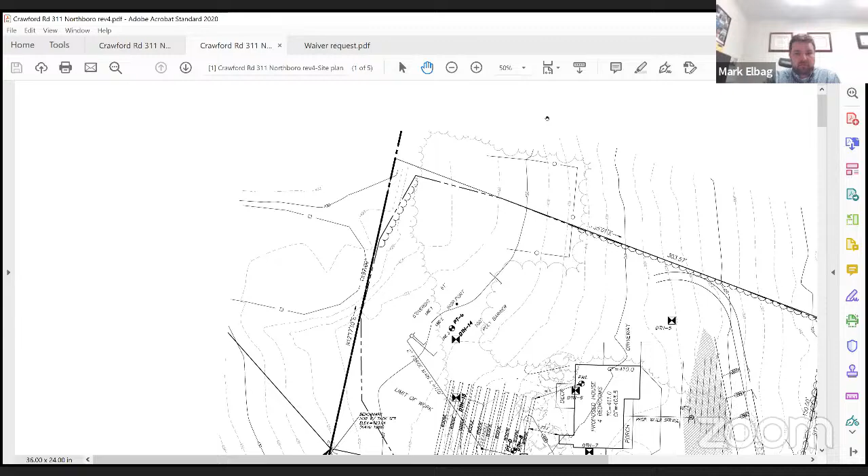So can folks see that? I'll zoom in a bit, it might cut off the letterhead, but I can see it. This is the basis of the lot, at a 50% zoom. So just to go back, we originally permitted, or this is the original plan set, just to bring folks back to where we came from. Okay, this is the original plan set.

It's a single family house to be served by an on-site well, private driveway, and on-site private septic system. The disturbance was right around 40,000 square feet, but this project came into this permitting process because it's part of a bigger 4-lot ANR. The current owners purchased just this lot off of the original landowner that had divided this up via the ANR process through the planning board.

So the original design has a driveway coming in. We designed somewhat of a long driveway to compensate for the slopes and the elevation climb needed to get up to the building envelope on the lot. We have the house in about the middle of the lot with the septic system in the rear, well in front, and graded everything towards this stone swale and a little velocity pool here before ultimately discharging to the street. As you can see, this entire lot is above Crawford Road. Everything does drain to the street.

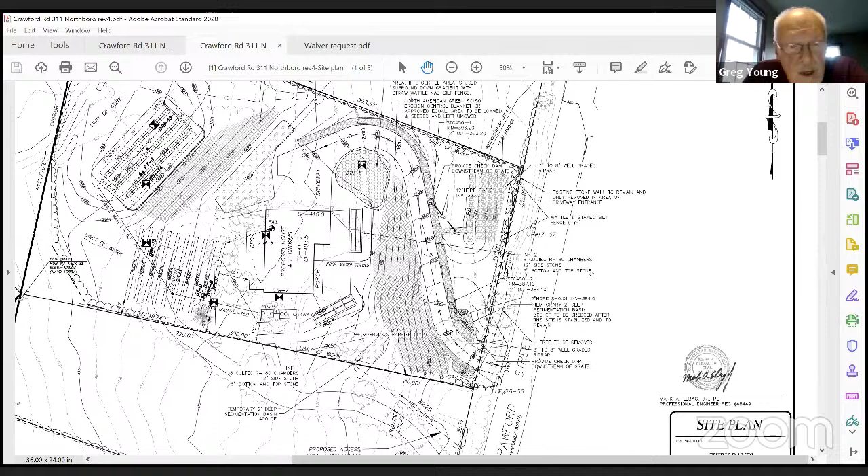Greg, I have a question and a couple comments, I guess. Go ahead, Justin. First, Vinny, so the driveway permit from DPW allows no water to flow onto the town street. It's written that way. I just don't see how that could even be possible if you have any lot that sits any bit above the roadway.

Like, there's a commercial development going in on Bearfoot right down the street from me. I know their driveway, at least the bottom portion of it, drains back onto Bearfoot. I know there's a couple house lots on 135 right now with really steep driveways, and there's no stormwater at the end of those driveways, so I know they flow onto the road. So I guess I'm just wondering, is this a new driveway permit or just something that's now being applied? That's my first question, and then I have some comments on this one.

But I guess the driveway permit's out of our purview, no matter what that is. Well, in response, I emailed the DPW director and asked that question, and his email was crystal clear: we don't allow drainage discharge onto town roads. And I asked if they can match the existing, kind of what the land disturbance permit said, and he was clear.

It's interesting, so that would mean that no driveway can rise from the road. Or, well, it can rise, but then have a little low point or a bump, so it kind of goes up and then a built-in trench drain that would discharge, which is one of the ideas Mark has come up with on this, that goes across. It's not so much the big storms they're concerned with, it's just the spring thaws and the fall thaws, where the water comes out and freezes on the road.

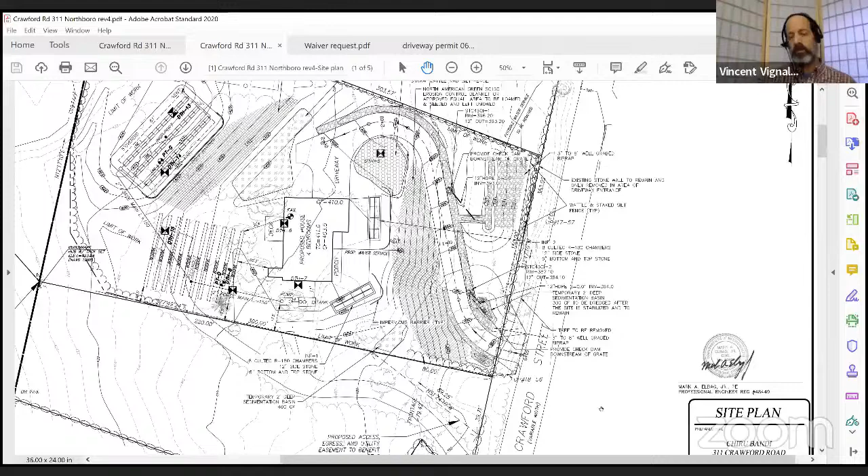Yeah, that came from DPW, so it's possible. I remember there was some discussion because there's that easement right on the south corner where the driveway is. The old driveway I thought was coming off of that - you can verify it, but I thought that's where that driveway was proposed to come in. Not on the lot, because then they found out there's another town requirement that requires the driveways to be on the property, not going onto a different one.

If you can still see my screen, that excavation is actually still there. Right, you can see the contours just off the south side of the lot. That's actually a question I was going to ask, Mark - it looks like that area is cleared and relatively flatter, like you could almost have a flatter area coming in and then curving up if that easement was to benefit this lot. I was kind of wondering why that wouldn't be used.

Yeah, I think that was the original - before I got involved, that was the original driveway location. But then they ran into trouble having their driveway not in their frontage. So it's only flat now because it was recently excavated. We're basically proposing to do the exact same thing, just a few feet to the north - a few feet north in their frontage, it's the same cut that's already been made.

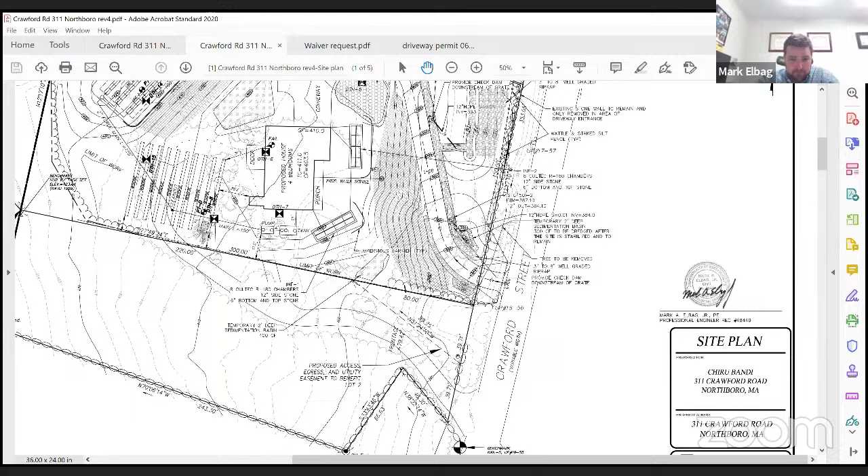I just want to add one more point. The initial driveway permit which we received is on the same lot itself, on our lot. I'm corrected then. Yep, thank you, Chiru, I didn't realize.

It was before I got involved. Forgive me if I misspoke. That driveway permit's on 311 Crawford Road, yes. Here it is, here you can see the screen - right, but the design would go into other property.

No, the owner corrected me and said it was on the lot, because this started right when I was starting here, so a lot of things were in the air when I jumped in too. The owner said this was a permit issued after they found out they couldn't use the property next door for their driveway, and they moved it onto their property. So I'm not sure, it's something to look at - it may be something to provide the DPW director and say, can we review this?

Because I had a permit a couple of years ago for it, it may be something for him to consider.

Yeah, and this was all just to really complete the whole story. They purchased this lot and viewed it as 100% permitted because it had a well, a septic design, and a driveway permit. Then because it was part of this larger 4-lot development, the land disturbance permit got triggered, but that kind of bit them because they did not see that coming, and it caught up to them when they already had their mortgage in place and were ready to start construction. So they really started this land disturbance permit process when they were ready to put a shovel in the ground.

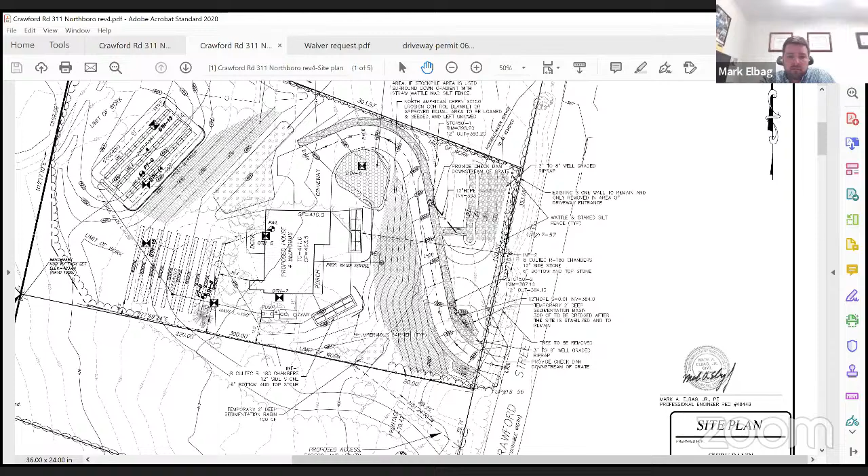The construction entrance is going to be on the driveway itself. This design ended up turning into like a 5-sheet set, so it's just a matter of whether the hatching was removed or not. I don't believe it is.

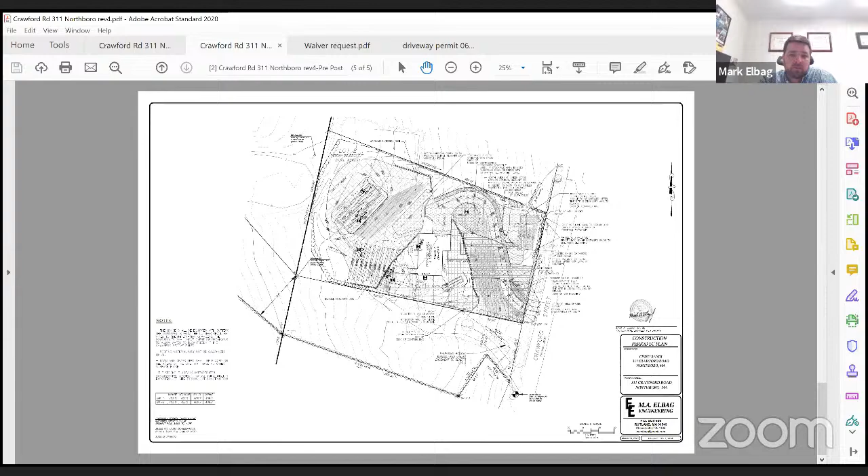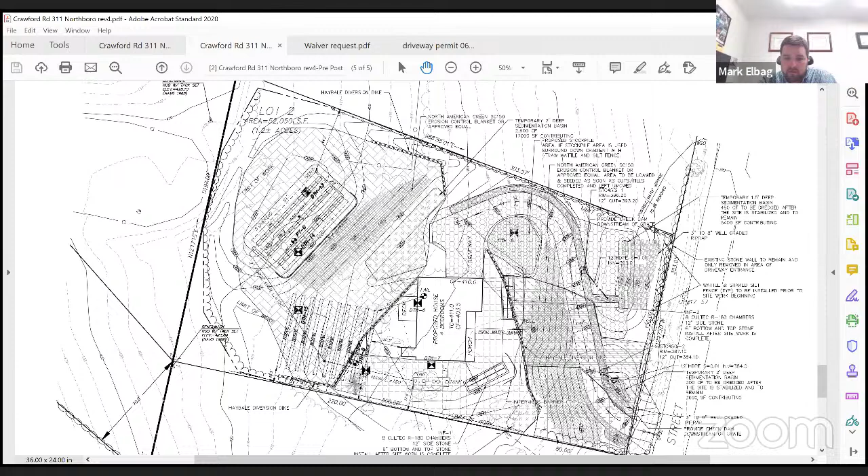Here's another sheet that we've since added, which I'm glad you brought up, because it's good that the commission sees this. It's now a 5-sheet set. We've added an independent sheet totally to cover construction period erosion controls. So there's our construction period erosion controls. We have a temporary basin to the north of the house, a temporary basin to the south of the house, and we're using that lower area as a temporary basin as well towards the road.

Okay, right, so there's definitely been a lot of effort in this. Sure, for this site, but this is one of those lots that you wonder how it can get built once there's a house on there. You wonder how they got it on there, and this is going to be one of those.

Okay, let me see if we have any public comment here.

I don't see any hands up. No, I don't see any hands up.

So Vinny, we're looking to continue this to next month and hopefully get some resolution from the DPW on what may or may not work.

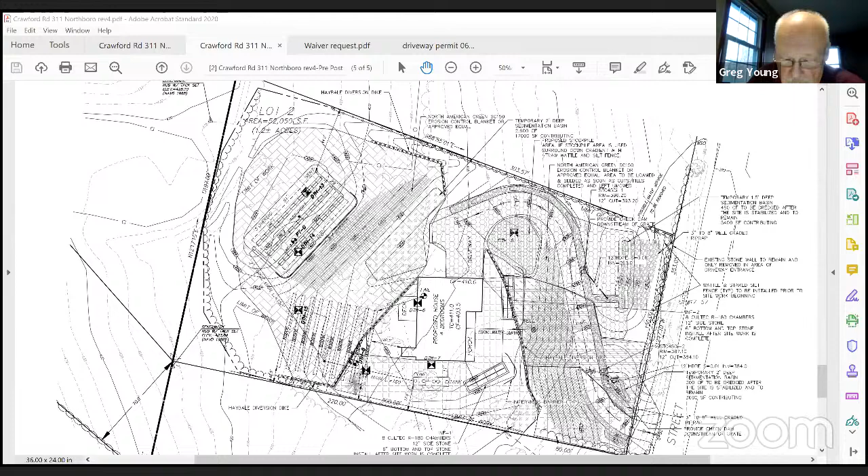Yes, that's what I would recommend, as long as the applicant is okay with that. Yeah, and there are these two waivers from November, as long as we get some sort of nod that these are at least going to be considered by the commission, because these are waivers that we certainly can't overcome, no matter what we do engineering wise.

I've just brought those back to your screen. And what's your thought on those, Vinny?

As Mark said, it's one of those things you can't overcome. You're in the groundwater, so that's one of the recommendations, which is a good recommendation in the land disturbance permit or the regulations. You don't want to be in there, but on this site, there's no other way to do it. And the whole site is more steep than where they say they don't want you to build. So if they're going to build on this site, they're going to be on a steep site and in the groundwater. And if that's something that the commission is willing to entertain, then we move forward. If the commission knows that we don't want that, then I think we need to let them know.

But he is doing a lot of engineering and practice implementation that should address the concerns as best as possible, but it's still a lot of water coming off a steep slope.

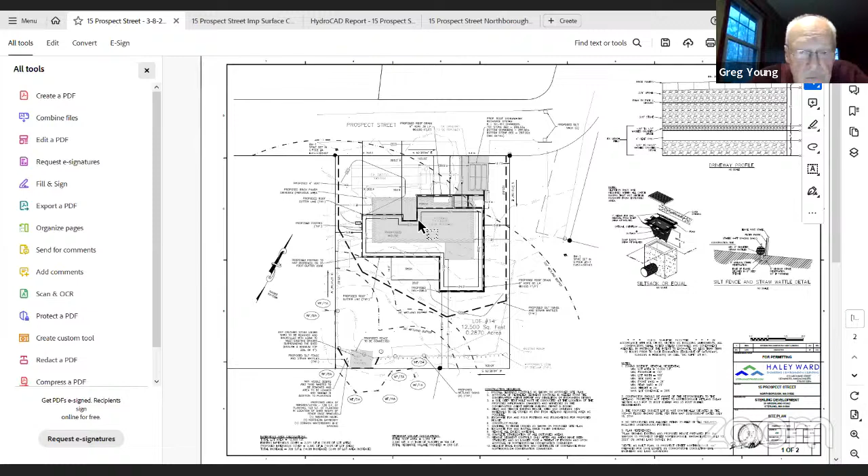So I'm not sure the last revision of the plan that the commission had saw, but in this process we had flipped the house around to stay out of the 35-foot no-build buffer. In this latest revision, we've added a recharge chamber located here in the place of the existing driveway, which is proposed to be removed. This recharge chamber is sized to infiltrate 1 inch of runoff across the entire roof area. We have added some roof drains and gutter lines to the plan to make sure the entire roof does get to that infiltration chamber system.

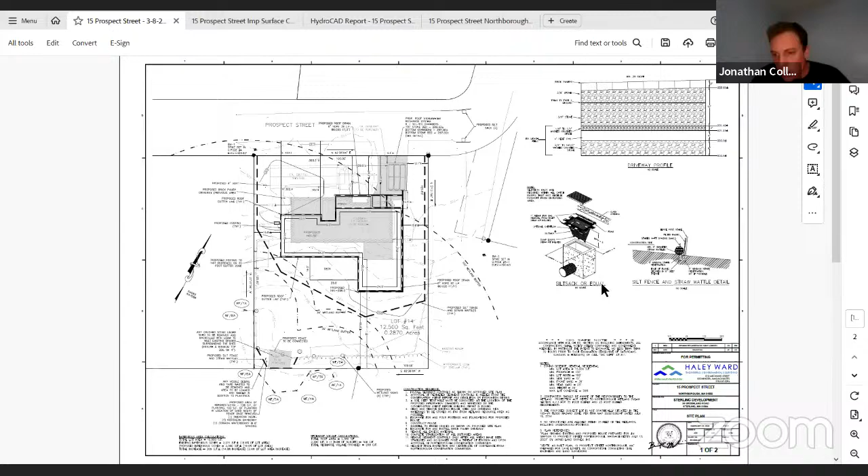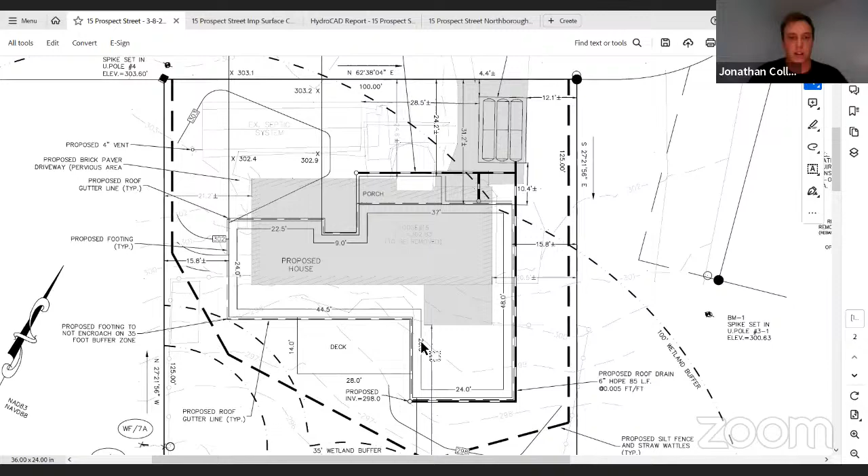Yep, that helps. So the shaded area is the old building and the driveway to the right, and the new outline of the building is there with the driveway to the left, right? Correct. Yep. So the shading is everything that's going to be removed, the house, the driveway. We have a shed down here. Is the shed going or staying? It's going to be removed.

Okay, let's go back up. So this is the outline of the proposed house, and then the proposed brick paver driveway on the left side of the house off of Prospect Street. I'll scroll down to the existing wetlands on the southern part of the property. This is the shed that's being removed. We have a fence line here. We're proposing to connect the fence line to continue it through where the removed shed was. We're proposing 5 wetland signs to be placed along the fence and then up in this area near flag 7A.

There's a fence there now, right? The fence is gonna stay? Yep, so this existing fence is going to stay, we're just going to connect it. The fence kind of goes into the shed and then exits the shed. So when the shed is removed, we'll just connect the 2 ends of the fence through where the shed was.

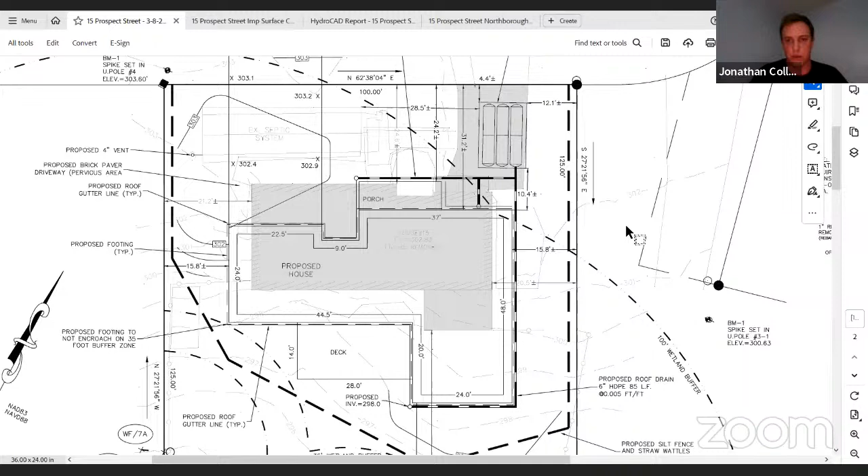We could potentially move the house closer to Prospect Street, which would pull it away. We're also showing the foundation - this dashed line on the outside of the proposed house is the foundation line. The foundation is out of the 35-foot zone, but we can potentially move it another foot to get us more room.

I just get nervous when something's right on the 35 because things happen, right? That's just my comment there.

The other comment I have is from the back of the lot when we looked at it. Vinny and I walked it last week. We're looking to get some cleanup done back there. Roughly inside the wetland flag area, as it's there, with 6A, 5A, and 3A inside. There was, it looks like, dumped potting plants, some old cans, a fence, a whole bunch of material.

There's a new note that was added to this since that was one of the commission's comments. So they revised and added a note that the areas would be cleaned up of other materials and seeded. They plan on doing the cleanup work that is needed, and Glenn Kravosky, their wetland scientist, is going to be monitoring the restoration work, the reforestation. He's committed to making sure that anything that's not supposed to be there will not be there.

Okay, good. My last comment is that I think 5 signs is a little bit of overkill - would probably be a record for the amount of signs we've had. I'm thinking maybe 2, 3 tops. Yeah, this one I agree.

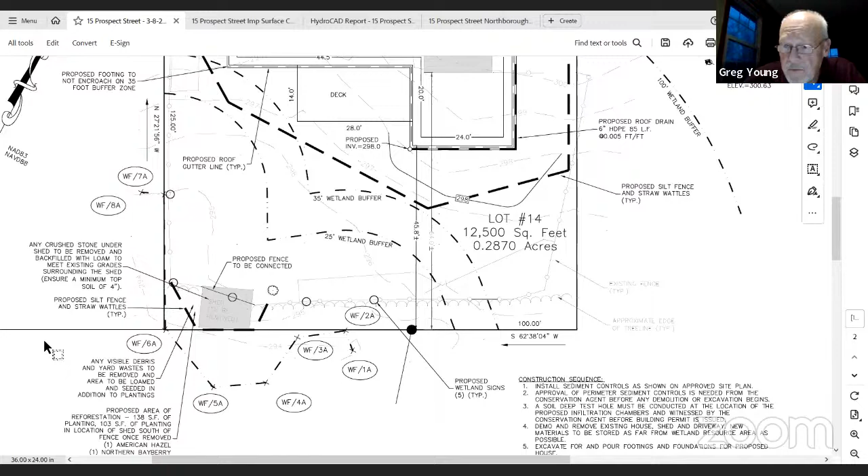Vinny, my comment about that corner being on the 35, is that a frivolous comment, or are you good with it as it is? No, they were a foot or under a foot closer on their first design. That was one of the comments that I made.

So they've slid it over to incorporate the idea of the footings underneath the foundation wall, because I told them if we measured 35 feet to the foundation wall, they're going to have to dig up the footings and keep them out of the 35 foot. So the incentive is there - they know we're going to be measuring, and so they said they're going to keep it out of the 35 foot.

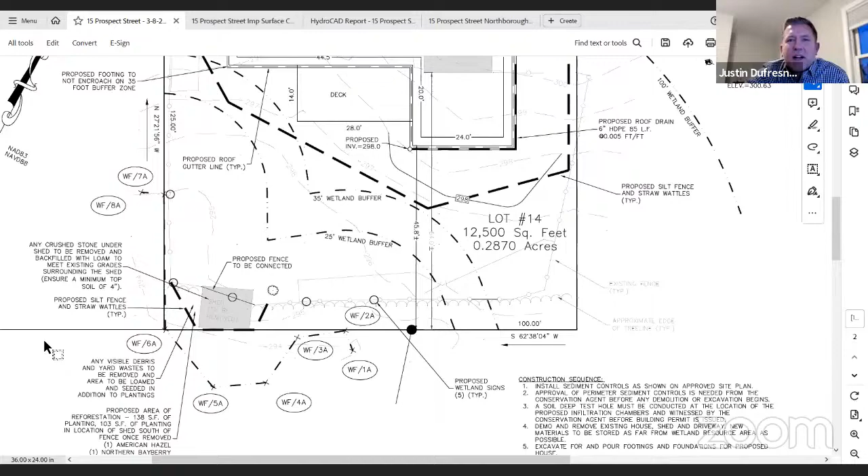All right, any more questions from the commission? Let me take a look - just a statement that I'd be careful about that tiny little bit of driveway that looks like it's going back onto the road, whether or not your DPW driveway permit - just where that 303.2 and then there's a 303 contour, it looks like a little bit of the driveway might drain into the road.

I think you'd be okay though. All right. I may not let that one go, Vinny. Justin will always have a comment no matter what the design is about drainage onto the road. That's good, keep me on my toes.

All right, let me see if we have any public comment here on this. I don't see any hands up.

No, nothing. All right, so the only condition I would have on this, and they've committed and agreed to it in their review, is that they don't have a soil test in the location of the infiltration basin. But based on the soil tests that were done for the septic system, which is right next to it, and the soil maps, it all looks like great sandy soil. So they're going to do the test before they start the work and make sure that it is the soil that we think it is.

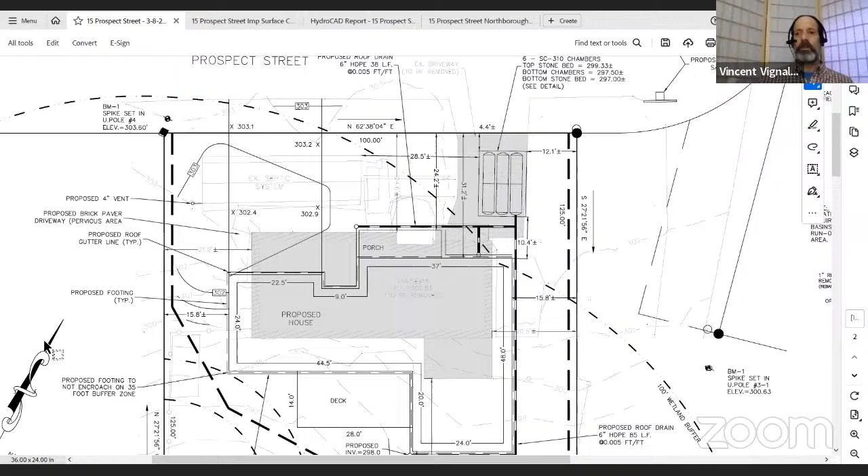Vinny, was there any replication here in this one? No, because they're not altering any wetland. Okay, just cleaning up a little bit around it, some cleanup. Well, it's not replication - they're restoring the buffer zone area, and there's no riverfront, but they're restoring the buffer zone area where the shed is taken out and where all the crud behind it is going to come out. Okay.

All right, if there's no other comments or concerns, we need a motion to close the hearing. So moved. Seconded by Diane. Roll call: Dan Clark, yes. Justin Dufresne, yes. Diane Goldner, yes. Todd Helwig, yes. I vote yes.

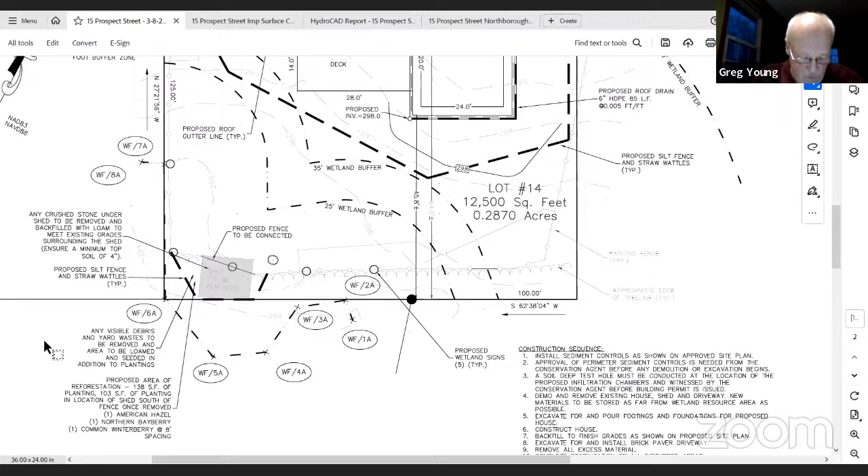Now we need a motion to issue an order for 15 Prospect Street. So moved. Seconded by Dan. Roll call: Dan, yes. Justin Dufresne, yes. Diane Goldner, yes. Todd Helwig, yes. And I vote yes.

Very good, you're all set, Jonathan. All right, thank you guys very much for your time.

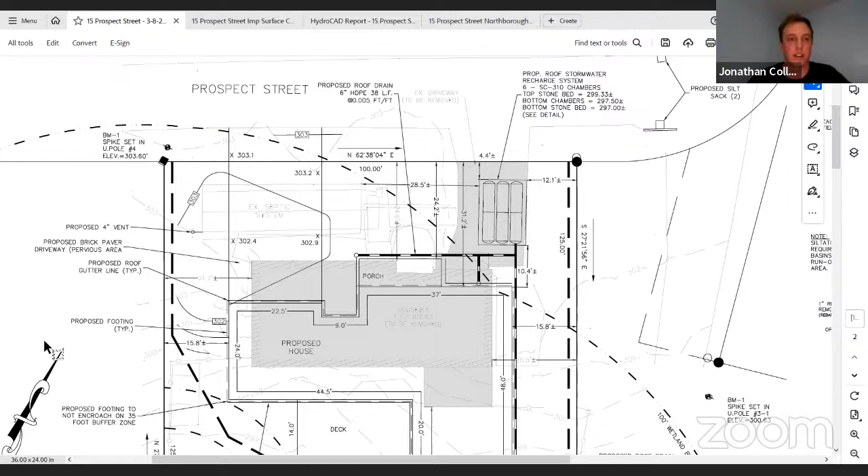Well, thanks for working with Vinny on this one for a while, I know it's a good result here. What's the timetable for construction to start? That I'm not sure, yeah, I don't. In lieu of not saying any false information, I'm not sure. Okay, just make sure that Vinny gets contacted prior to the start, as soon as the erosion control devices are in. Absolutely. Super, thank you.

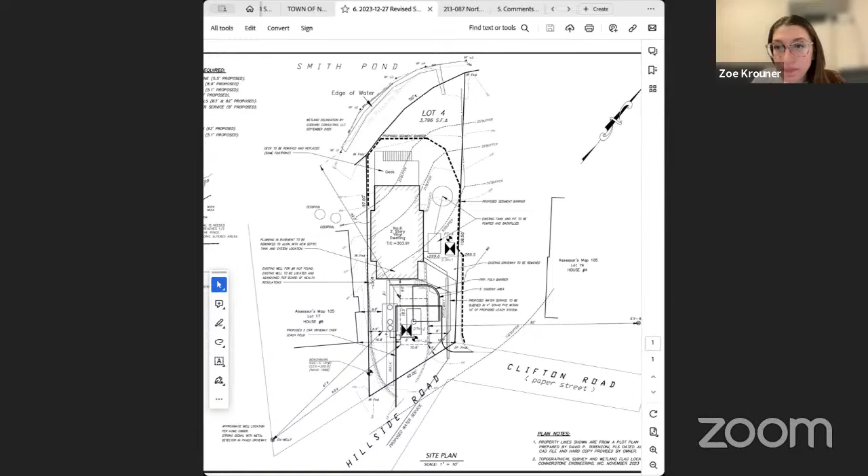Zoe, can you put your plan up just so we can see it one more time, please? Sure, yeah. Is it up now? It is. Yep, all right. Can you make it a little bit larger, maybe one click? Oh, that's pretty good. All right, can you drop it down a little bit so I can see the edge of the water? Other way. There we go.

All right, so if I recall, you're staying within the existing footprint, right? Sorry, what was that? You're staying within the existing footprint. You're going to raise the house, are you? Oh, no, they're not, yeah, staying within the existing footprint. I think they're just redoing parts of the exterior and the interior.

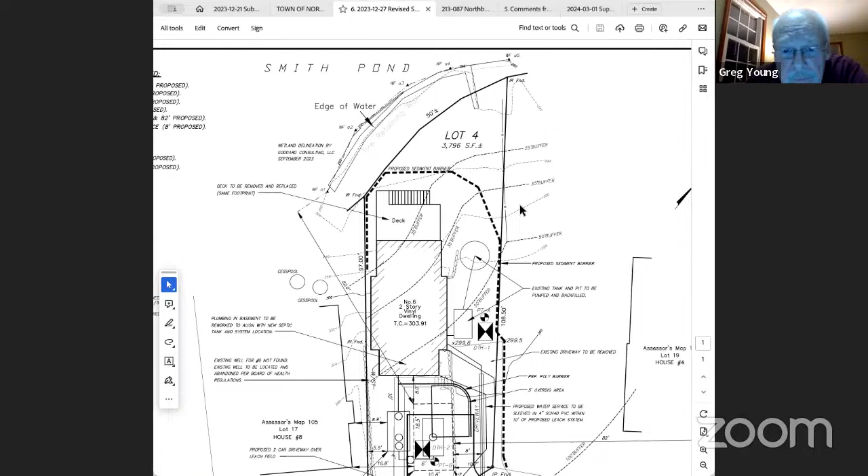But all work, yeah, is within the existing footprint. Yeah. So inside the 25 foot, but we'll work within the 25, which, as you know, is normally a no build, no touch area. That is already existing. What's there? You're just upgrading what's there. Exactly, yes.

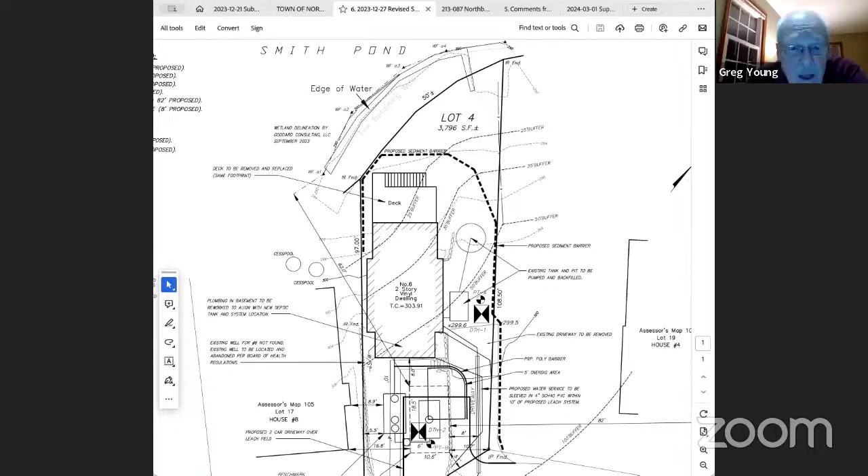Where are the tires again? I'll zoom in. See this piece that sticks out? It follows down and around here, basically along the bank, and ends right here.

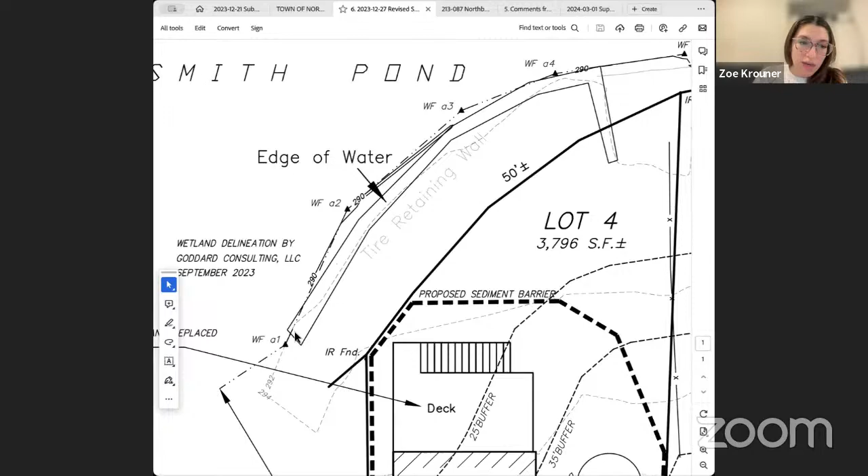The surveyor is not really saying who owns that piece. They're saying that most of those tires are not on our property or your property. That's correct, and that's perfectly normal for a surveyor to say.

We don't know who owns the tires, is that correct? So we don't really know who owns the shore there. Correct, apparently not. The assessors don't have information on who owns it. Seems like a situation of don't ask, don't tell.

I don't know why we would, if the surveyor has determined that those are not on our property, then they don't have to deal with them, fine. And I don't know why we need to go making arrangements to have us deal with them if there's no indication that we actually own that piece of property, and they've been in there for an eternity.

Well, I think part of the initial reason, Todd, was when we first saw the property, we found this waste hazardous material sitting there against a water body. And what do we do about that?

My recollection of that hearing was that one of the things we decided was that it was going to do a lot more damage to take those out than to leave them there. That's a possibility. Yes, that was said at the meeting. We weren't sure whether it was even an impact or what the issues were.

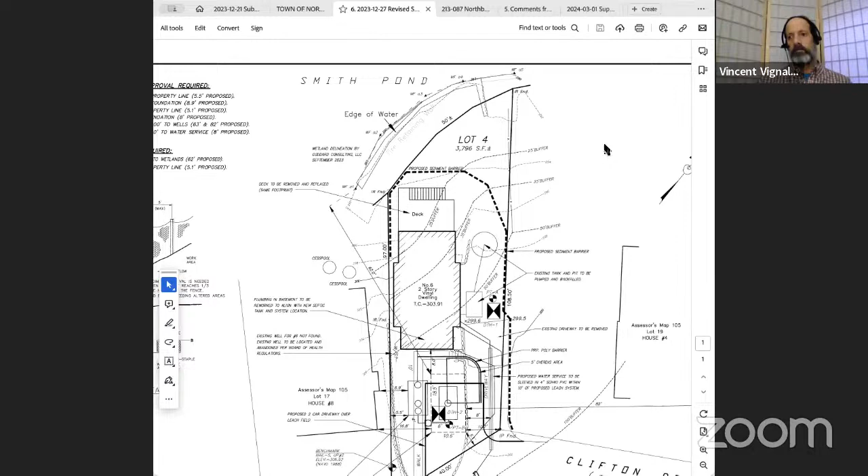You're thinking a sign on the left and three boulders in the front? That sounds good. Seems reasonable. That work? Yeah.

And maybe, just from experience working with you guys and other commissions, maybe give the applicant some flexibility with their demarcation strategies. Maybe say put at least one sign and two other things, like two boulders or two granite bounds, just give some flexibility to whoever is going to buy this. Like you said, Greg, someone else is going to buy this. So if they hate boulders but love granite bounds, maybe that's the thing to do. Give them some options.

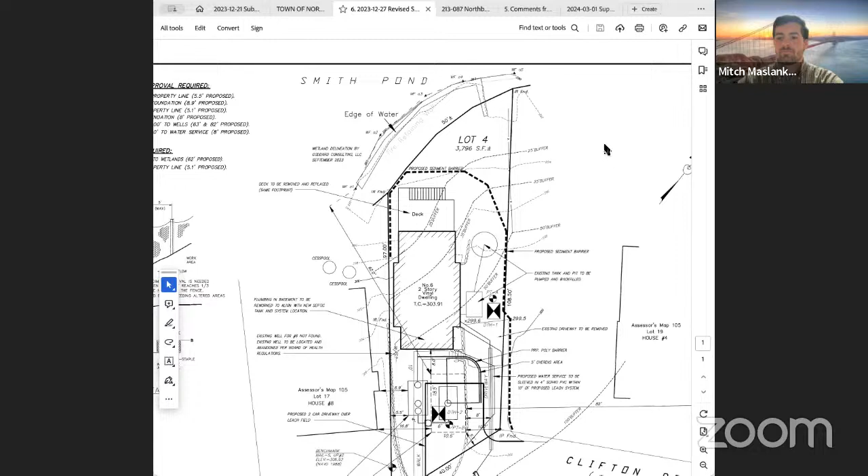I don't know if the bounds quite gets us to where we want to be. I think it's more something that's a little more visible, Mitch. So in my mind it would be a few sizable boulders in there, or maybe a split rail type thing. If the applicant or next owner wanted to do something different, it could be a small low split rail fence or boulder, something that just shows where that rear property line is and keeps people on their property. I can word it to allow any of the three.

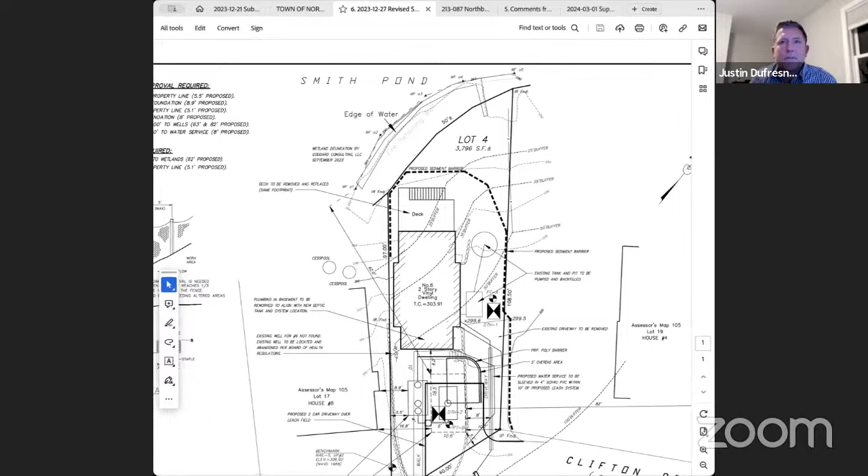That seems reasonable, as long as we give them some options and put it in the condition, in the order.

Let me see if we have any public comment. I don't see any hands up. Okay.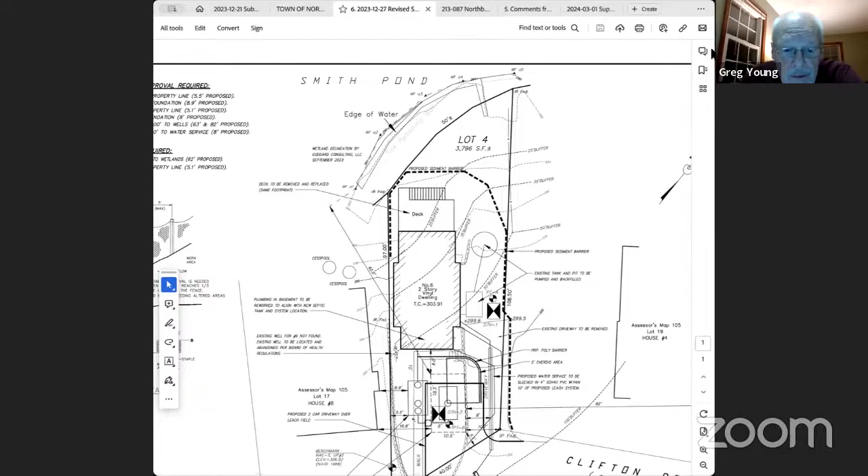Any more questions or comments from the commission? Move to close the hearing? Seems good, second. Before we do that...

Zoe and Mitch, are you all set with what's being asked here, what the order is going to look like? Yep. Okay, thank you. Yes, Todd made a motion to close the hearing.

Is there a second? Second, by Justin. Roll call: Dan Clark, yes. Justin Dufresne, yes. Diane Goldner, yes. Todd Helwig, yes. And I vote yes. Now we need an order.

We're gonna have our standard order with all standard special conditions, plus an access permission for the easement land. I've got it on videotape, so I'll take it from there. And then a limitation at the property boundary with either signs, boulders, or fence, or a combination thereof.

Correct. We want to put a time limit on the decision for what to do for the fencing. Should there be a time limit prior to occupancy, or prior to what?

For us to sign the COC, I think it would need to be on there. Yeah, I think it would be for the certificate of occupancy, not a compliance, because we sometimes get the COC requests 18 years later, which we're getting next month. Well, that'd be good then. If we could tie it to occupancy, that's better. All right, the CO, right?

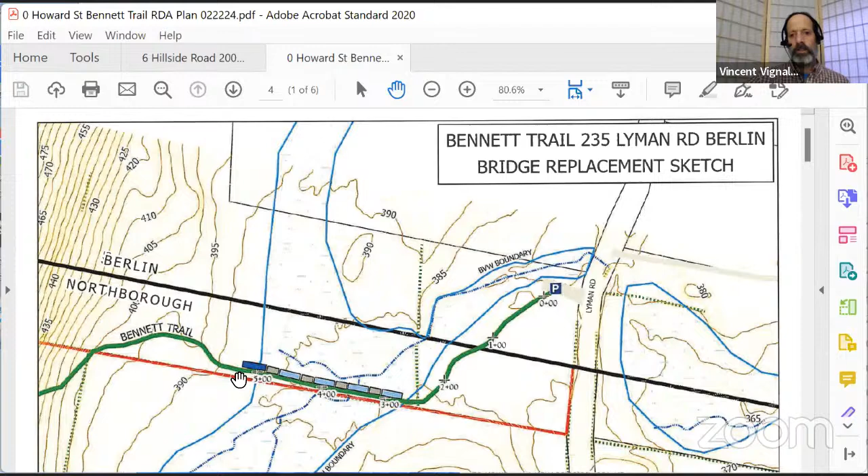So then it crosses a stone wall and then is very wet. There's another stone wall along this property line. There's a system of bridges and a pathway that traverses the wetland area, and comes over to, or actually almost traverses the wetland area, ending about 30 feet or so short of the end of the wetland. So they're proposing this new 50-foot section of bridge to keep the pedestrians out of the wetlands, and then continue on up to the upland portion of Bennett Trail.

So they're proposing to rebuild the existing bridge structures and put in a new one at the end, rebuilding the structures that are over the existing stream that runs through here. It's not a perennial stream, it's intermittent, and they are proposing to put it on helical piles and support it so that there's a span and air below the actual bridge structures.

In between the bridges, there have been areas of the path that have kind of washed out or been treaded down so that the roots are visible and evident. During wet periods, the trail widens out, and you can see the treads of people walking 10 feet wide. So what this was trying to do was narrow that big wide expansion and focus the people so that they know to walk on the area where it's been improved.

I don't have that up, but that's basically the project proposal. If you want to add anything more, Brian? Yeah, just for a point of clarification.

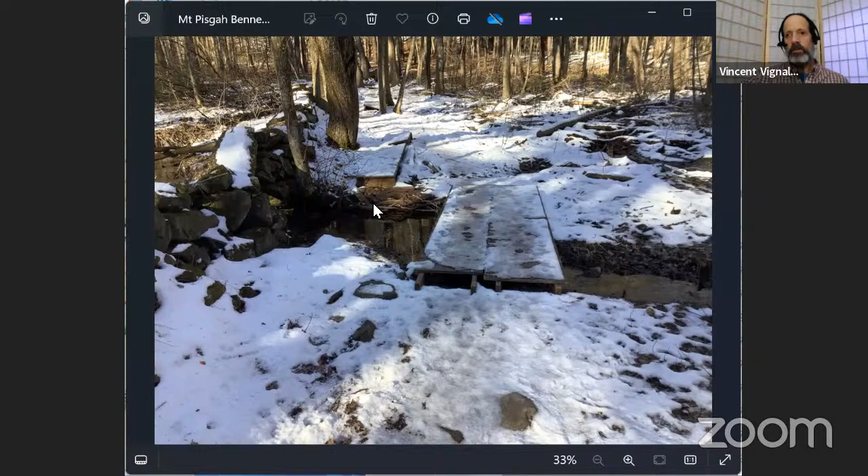That it's just going to be in areas where the roots - I think there's another better picture - kind of in this area here between these bridges, there's a lot of roots that have been, the areas have been packed down. Here it is. Yeah, this area here, it's been packed down so that it's not as easily passable.

So it's just going to be filling in areas that when this is really swampy and wet, the stones stay up and out of the water, and the people can walk on drier land. So there's really less impact to the wetlands, and the stones are clean, so any water just washes off there and goes in. So it's kind of a win for both sides, but it's a connecting path that goes all along through here.

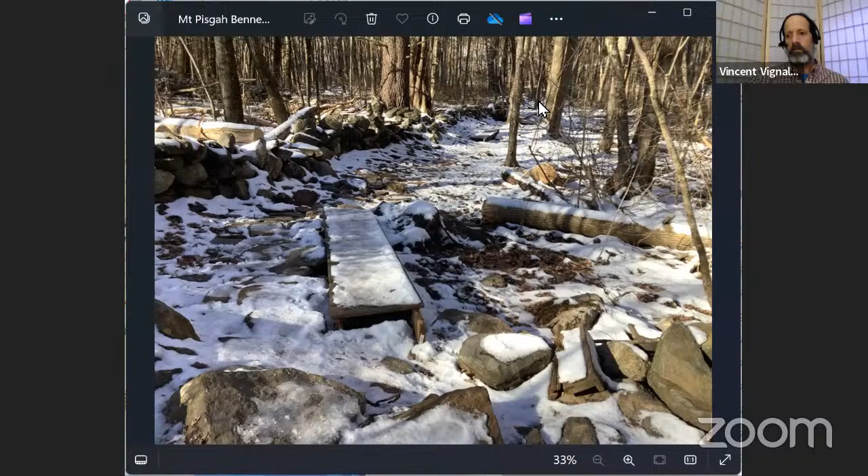Okay, very good. And you can correct me if I misspoke, Brian. No, that's totally correct. We would just be creating the visual element of a trail for people to follow, and also just leveling out with either 3/4 crushed bluestone or some other 3/4 crushed stone.

That's just - I called that one out because that's common and useful, and it kind of settles in quite nicely as far as people walking on it. Doesn't wash away. So the trail's in rough shape for sure - this is going to be a significant improvement.

Questions, comments from the commission?

I'm familiar with it, and it's a mess. We're not going to stop people from going through there, so it needs to be fixed. I'm with Todd, I've been on that trail many times. It could use some improvement, so I think this sounds great.

And Brian, you've got the materials, you've got the resources lined up? Yes, I have a full material list, I have resources lined up, I have budget all lined up to cover all of it. It's mostly just a matter of making sure that it gets approved, to make sure that it's all legitimate.

A little bit of additional coordination with Berlin, because presuming it moves forward, we'll be using the parking area as our workplace staging. But it's basically not really much different than any of the Trails Committee's average projects, it's just scaled up because it's a lot more and a lot longer. And of course, there's a new section going over some wetlands.

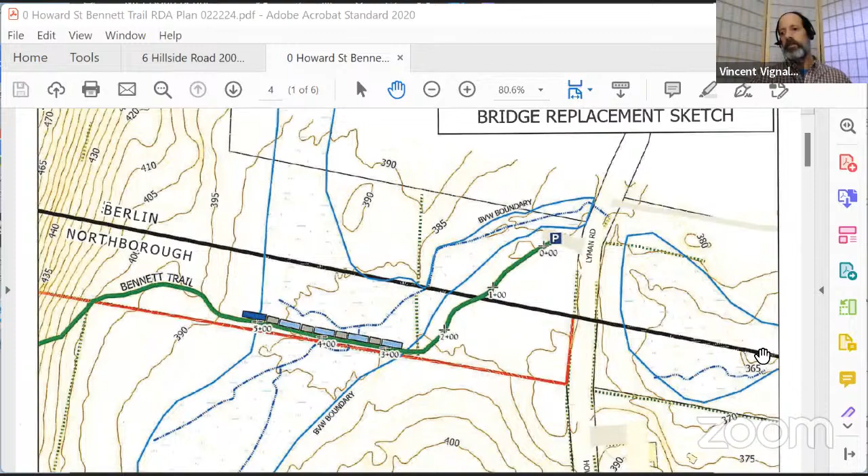And just while I'm thinking of it, Brian, the fire department said they have a gator or a vehicle that could help haul stuff in if needed. Just contact them. Perfect, that would be quite possibly fantastic to have.

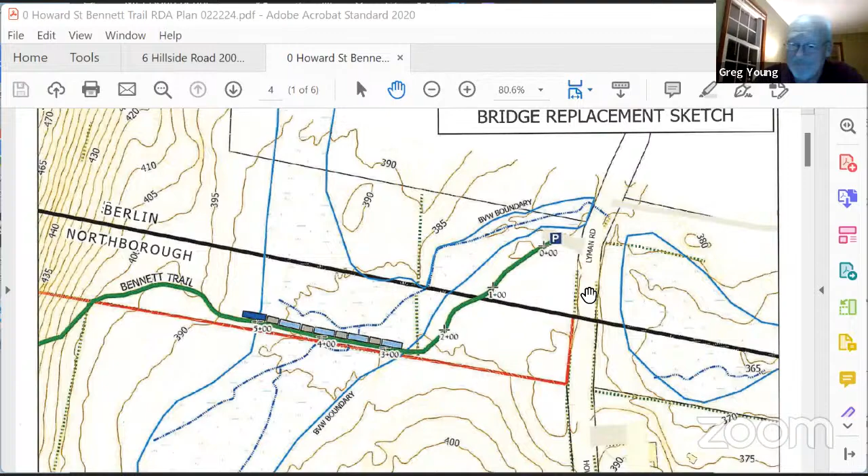All right, I think no more comments from the commission. I'll see if we have any public commentary. Don't see any hands up. And this is an RDA.

So I'm thinking, Dave, that we would have a negative determination, any specific notes or questions here, or comments? We close the hearing and then we do the RDA, or a determination would be negative. We don't really have a standard, or any other standard conditions, I don't know. It's just that it would be notification before the work starts, so I'm going to know about it, I'm sure. Yeah, won't be able to get out of it. So, yeah, but all right.

We need a motion to close the hearing. So moved, motion made by Diane. Is there a second? Second. Second by Todd, I believe. Yes. Roll call: Dan Clark, yes. Justin Dufresne, yes. Diane Goldner, yes. Todd Helwig, yes. And I vote yes.

So we now are going to have a motion to issue a negative determination, with what kind of commentary do we need, if any? Just notification, 48 hours in advance so that I know that it's starting. Yeah, because there's no devices being installed, there's nothing going on. No, they really can't do erosion or sediment controls on it.

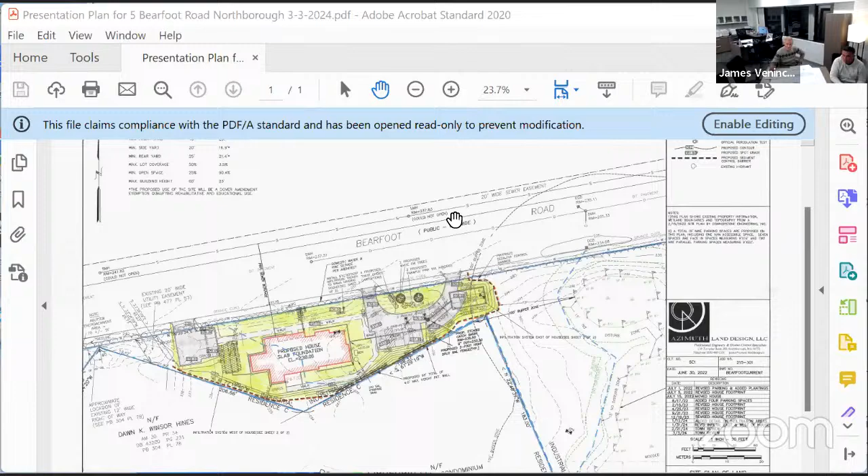So as the agenda says, this is a request to amend a previous order of conditions at 5 Bearfoot Road, file number 247-1161. That order of conditions covered a proposed daycare, which was to have work right off the then-permitted no-disturb zone. We're now proposing to be much further away, 73 feet at the nearest point from the wetlands, as opposed to probably 15 or 16 feet as previously proposed. Vin's got the plan up there.

So we have only a slight intrusion into the buffer zone for some in-ground infiltration. Again, nearest point 73 feet away, everything else is further away. The dashed blue line you see was the limit of work under the previous proposal for which an order was granted. What we're proposing, except for a little bit of work way west of the wetlands, is really just a subset of what was proposed before. You can see the blue line going through the center of the now-proposed house - that was where the limit of work ended before. So we're going a little west of that, but not starting anywhere near the wetlands compared to before.

We had a couple of iterations of revisions to the plan, refining the drainage and parking per your agent, Mr. Vignali. I think we've got a good design for this now. We did an additional deep hole in the hatched area west of the building to account for the soils there. We thought we'd have some great stuff, but actually ended up with so-so results - the design is based on it being sandy loam. I guess I'll just leave it at that. We think it's something the commission will hopefully embrace, because we're working much farther from the wetland. We're altering less land, about 20,000 square feet versus 28,000 before.

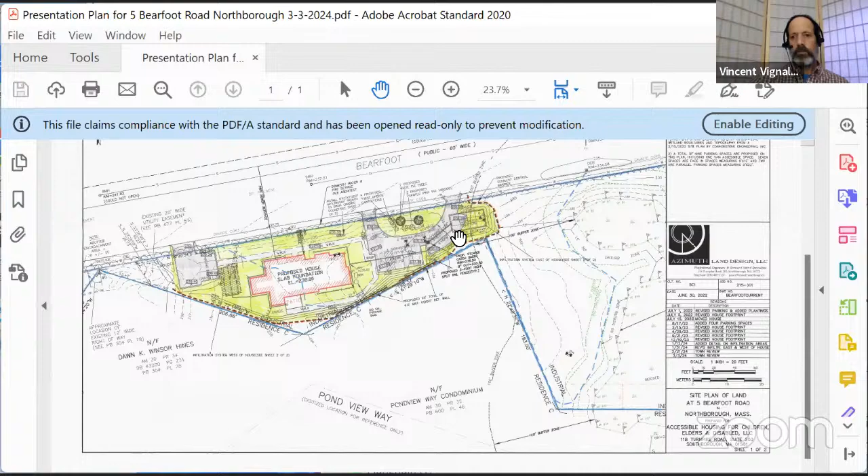Is that where it was, Vinny? I thought it was further back, no? Yeah, no, it was when we were standing right out here, we could see that stake for the corner there. Oh yeah, right, it looked like it was going right out through here. So it's really not - I think this is probably one of Todd's specials where we don't ask, don't tell. They just leave it as it is because there's going to be pavement right here. I can zoom in a little to see it better. We can't officially encourage it, but there won't be a guard.

So they're filling this area for an underground system, and there's only going to be paving on this corner. The idea is that's a 3-to-1 grade there around that infiltration, and there's no fence proposed here. There's a wall here and a fence there because of the slope at the top of the wall, but here it's open. So worst case, the trail would end up being worn in over here if it exists.

So I don't think the town needs any easement or official approval for it. As long as they don't propose to put a fence across, I think the people in the neighborhood that use that will be appreciative of that.

Vinny, did we have any signage in the initial order? I don't think there were signs back when this was originally ordered, but I think one of our standard conditions is to have a sign here because there are fences here. We could have them put a sign every 25 feet, which is the standard wording in the standard condition. So every 25 feet, a sign, a boulder, or a fence - and they're already going to have the fence there, so all they have to do is mount a sign onto the fence.

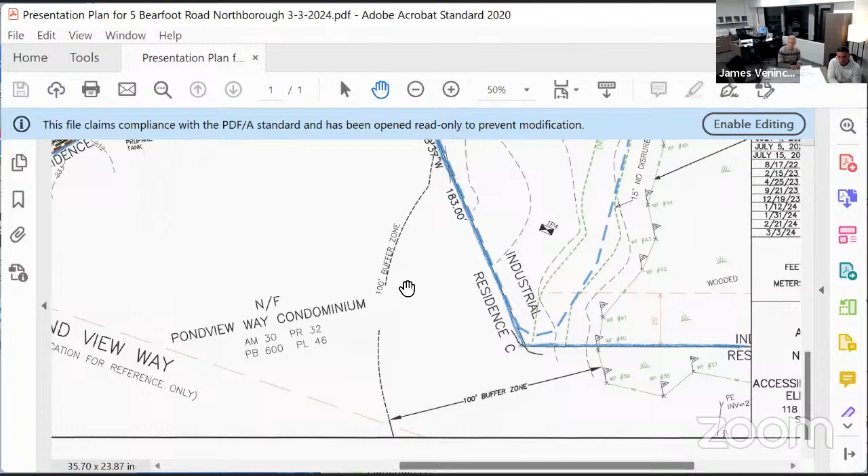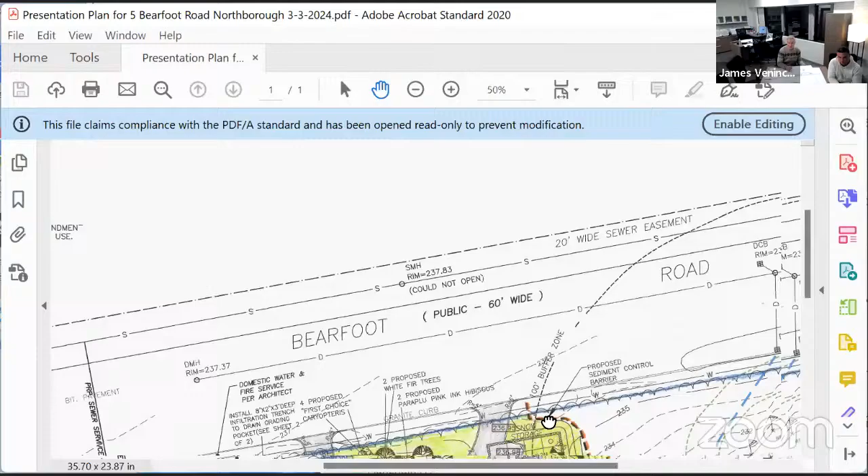As far as this proposal versus the previous one, because the area altered is really just a subset of what's proposed before, I think this is actually going to be much better for maintaining sound buffer from the intersection of Solomon Pond Road and Bearfoot than the previous proposal. The trees removed here are really in the way of sound from the facility across the street, which, if the couple times I've been there are anything to judge by, makes very little sound compared to the intersection noise. Right, it's not really the sound, it's a privacy buffer against the industrial Bearfoot Road area.

This would really take a big chunk of that away, which I believe is going to affect our property values.

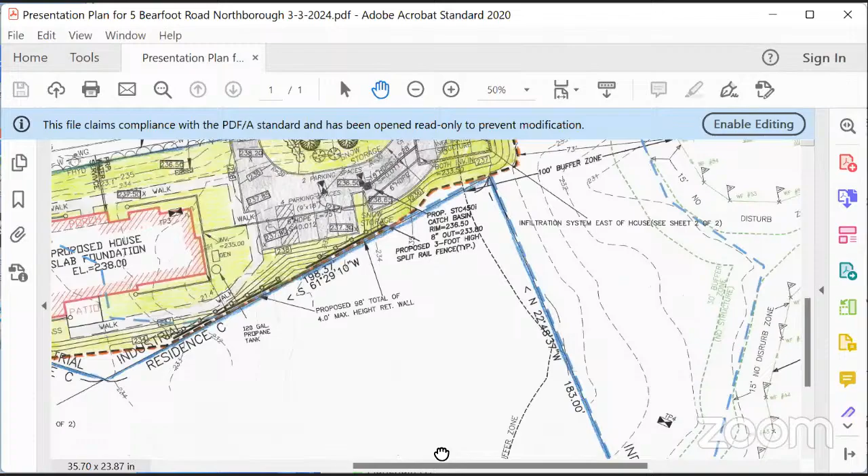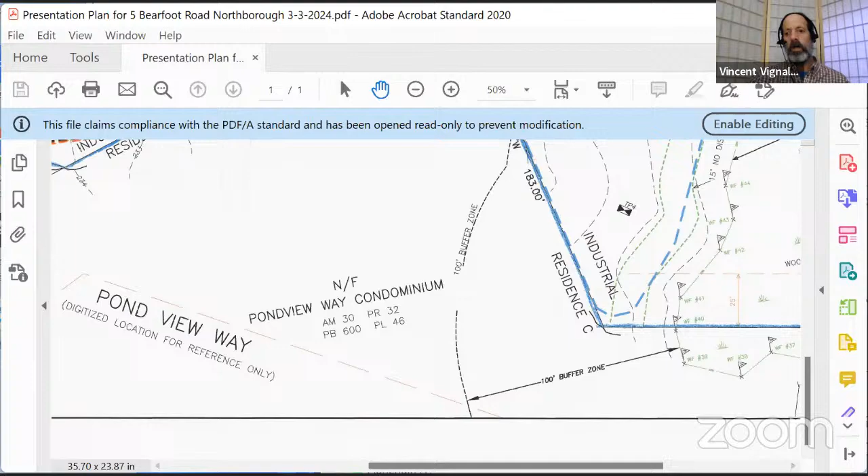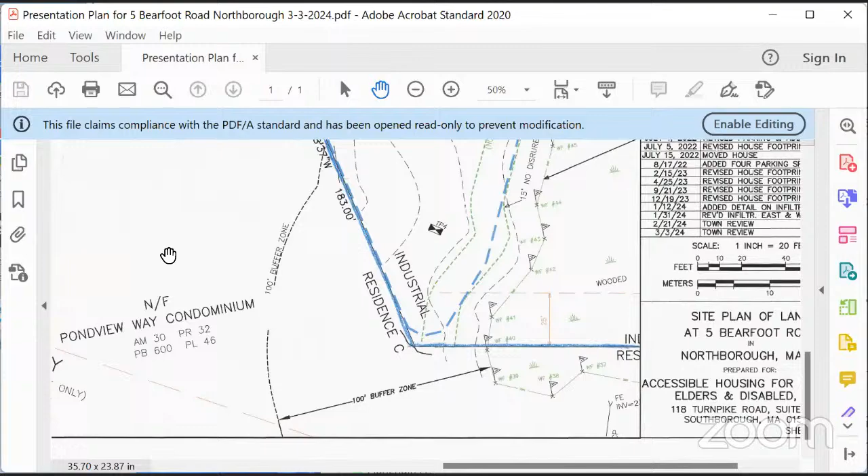Just trying to juggle this image, but their proposal is here. To get to where the condos are, you have to go across this section of wooded area. This is the driveway, and your units are on the opposite side of the driveway, so it's even farther away than what they were proposing here. It's not that far away. I don't know if you've been to that area and looked at it. I have. It's not far away, but it's farther than what they were proposing. Granted, and they had an approval for that.

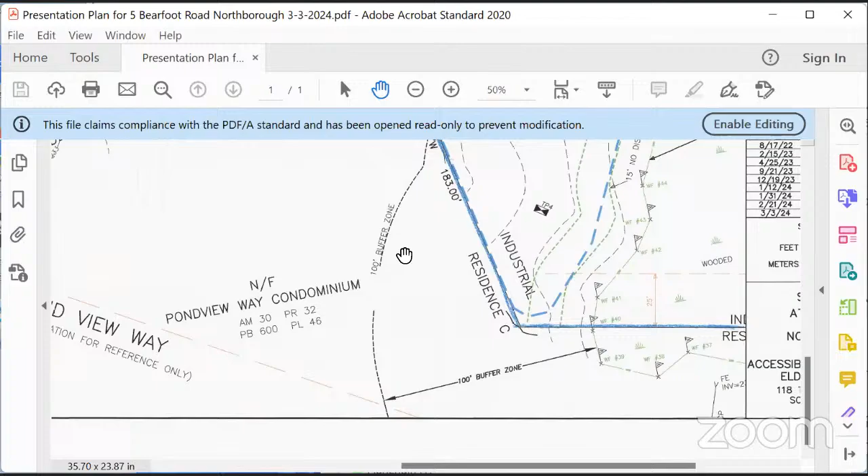I don't think either proposal was really the highest and best use for this area at all. But in either event, they're not related to things we have jurisdiction over. Right.

Okay, thank you, Carrie. Thank you for letting me at least weigh in. Of course.

Okay, I thought I saw another hand up here. Let me see, I've got Janet. Janet, I'm going to bring you in, you can talk here. I'm asking you to unmute. How's that? It's good, we can hear you. Okay. My concern is what type of... one second, Janet, could you please identify yourself and your location? My name is Janet Sandstrom. I live at 1B Pondview Way.

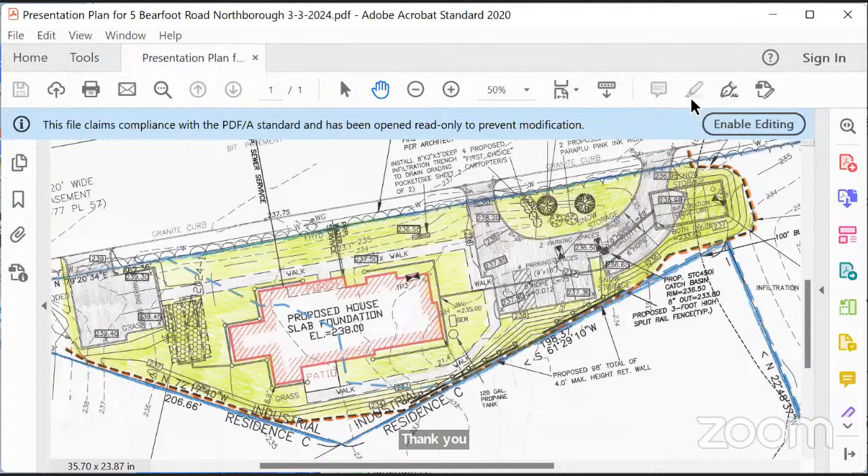Thank you. My concern is what type of a fence are we going to have there? And it looks like it's going to be open in areas, or is it going to be a full fence that goes to the wetland?

Mr. Chairman, I'd say maybe there's a misconception about just how much fence there is. The dashed line with the orange highlighting at the limit of work is the sediment control barrier. Oh, okay. It's not a permanent fence. I see. So is there a possibility we can get some kind of a barrier there with a fence?

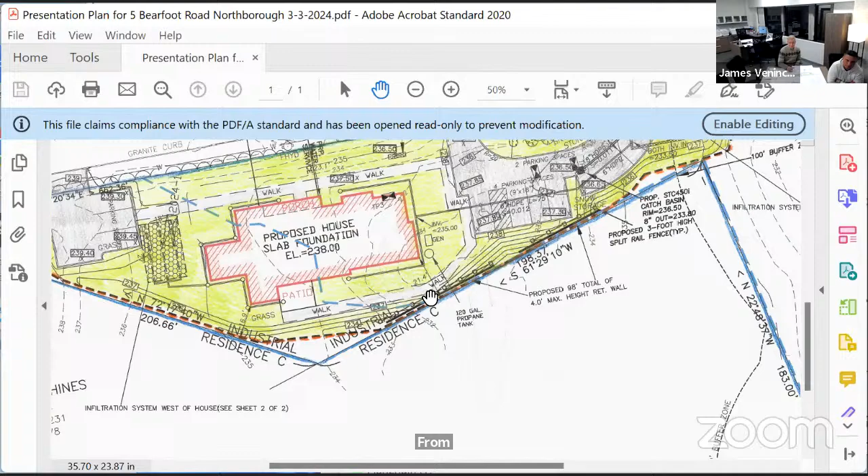Fencing is proposed in two locations, off of the parking, and a little further on where it would be separating the house from development further to the southeast. That's going to be a fence? Correct, there'll be a fence atop a low retaining wall in both of those locations. What kind of a fence is it going to be? A split rail fence. It's really just for safety, so somebody doesn't fall over and can stand there and gaze into the woods as they may wish.

Is there any way we could put up some kind of a privacy fence? At this time, there's no plan for a privacy fence. I'm sorry, would you repeat that? At this time, no, we're not proposing a privacy fence at this point.

Well, I think the residents deserve to get a fence of some kind, a privacy fence, because even though it's wooded, noise travels, and that is a bit. We hear the road noise from Bearfoot Road. I'm sure we're going to hear vans backing up and cars in and out. I feel as though a privacy fence should be constructed by the people who are building the building.

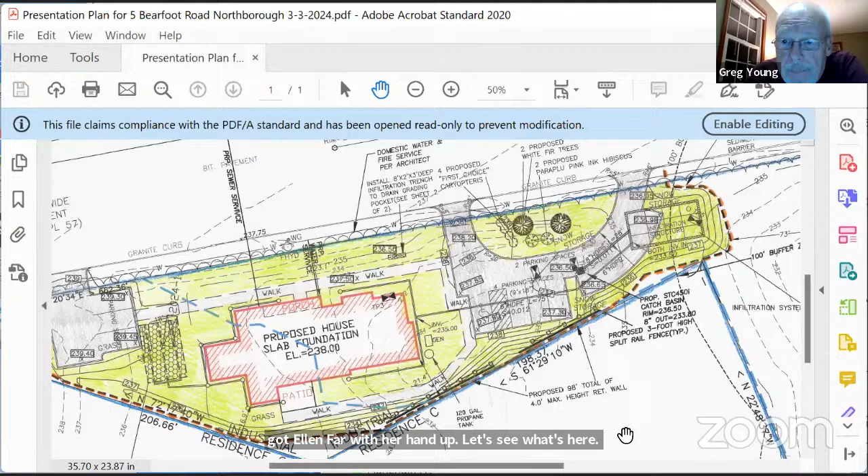I'm here. Can you hear me? Yes, we can. I'm Ellen Farrar, I'm at 1A Pondview Way.

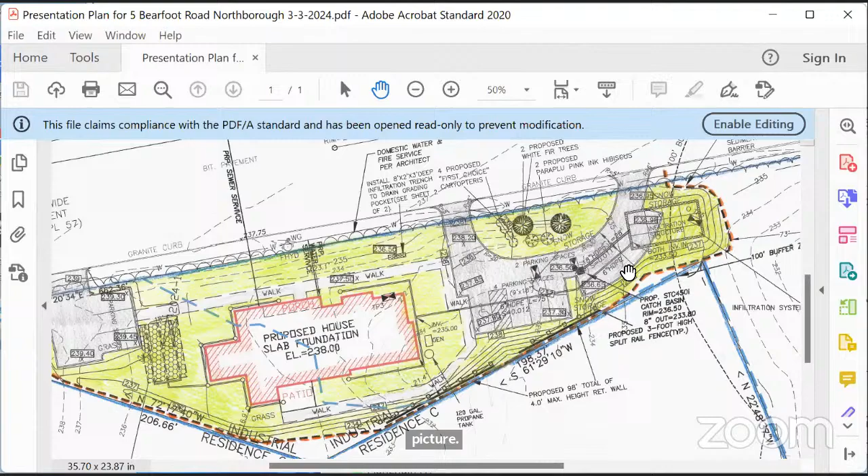It's maybe an add-on to Janet's question, but it's not clear from this picture. Along the dotted perimeter, can you explain how much footage there is of trees? That white area you're saying is all trees - does it run the full length of that dotted perimeter?

And for how many feet towards Pondview Way? Sure. The area that's not colored is to be left alone. If you look at the triangular bottom of the property lines, there's an area where the sediment control barrier will be off the property line by several feet, but on each side of the triangle, rising left and right, the sediment control barrier is going to be close to the property line limit.

Obviously we're not going over onto anyone else's property. Those trees on adjacent properties are going to be left alone. There are treed areas to the far west of the proposed house that will be left alone. And one of the focuses here was that a large area closer to the wetlands to the east of the proposed development is to be entirely left alone.

So along that full dotted perimeter, or the blue property line, there is going to be trees for some number of feet towards Pondview Way?

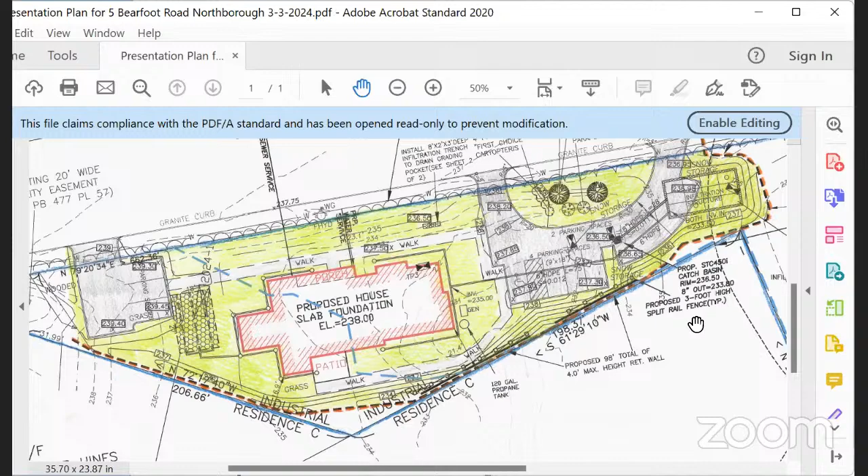I'm not exactly sure what you're asking me, because if you're looking on that property line, the designation saying Residence C, and a little further on, it says 198.37 feet - for much of that property line, the limit of work and the sediment control barrier is going to be just off the property line.

But beyond that blue line is another property. We're obviously not touching an abutter's land, and that's going to be left alone. And as Vin McNally was saying, there's varying 100 feet or more in certain areas of woods that's going to remain untouched. Yeah, that's great.

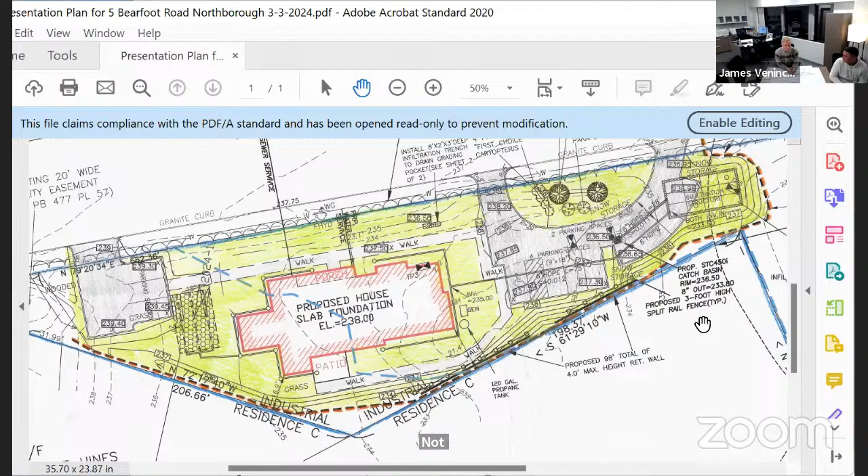So there's 100 feet or more along that blue perimeter untouched? Not along the blue perimeter, beyond the blue perimeter. Yeah. Sorry about that. No.

That's helpful. It's a little confusing because the dashed blue line there is the old limit of work under the daycare that was previously approved and given an order of conditions. That was just to show where they were proposing to end work. And all that white area you see there, for instance, the note saying infiltration system east of house, see sheet 2 of 2 - that area is all to be left alone.

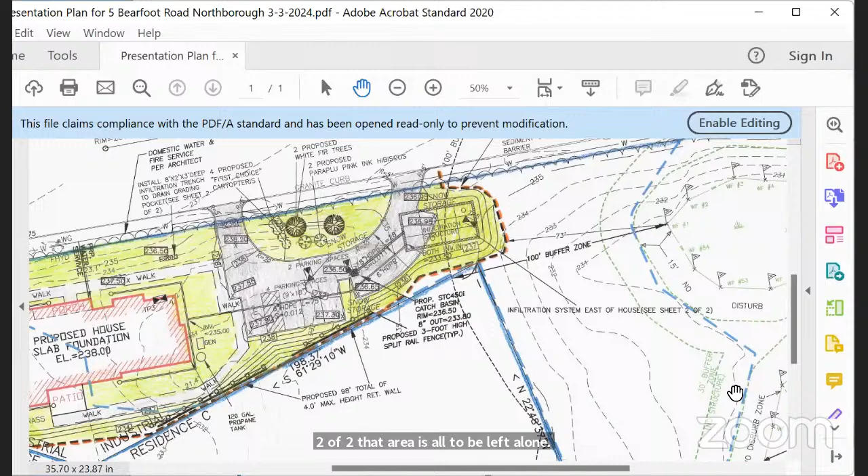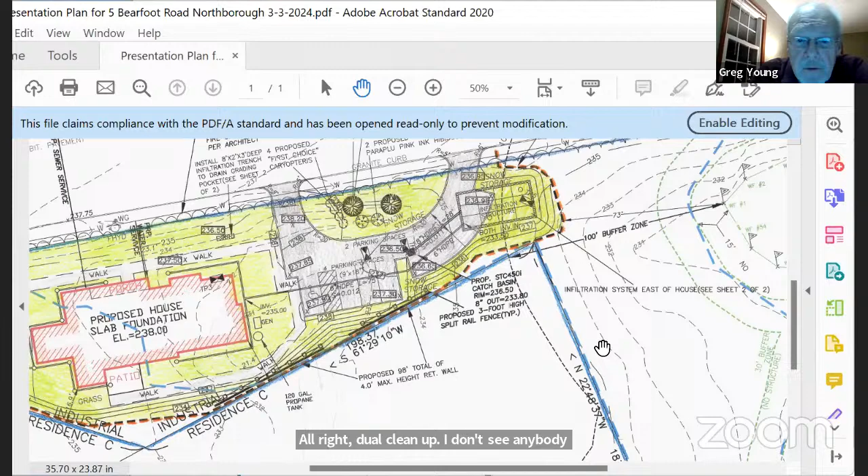All set, Ellen? Yep, that's great. Thank you. Thank you. Okay. All right. I think we're good here. All right, do a cleanup. I don't see anybody - no other hands up. All right.

Well, if there's no further questions, this is a request to amend the order of conditions. Vinny, we're going to close the hearing and then take a vote. Would we want to capture the CR requirements and timing somewhere? Yes. Would that be in the amendment of the order? Yeah, when I draft the amended order of conditions, I'll add that as one more condition.

And I reviewed the order - I can remove the ones that are not applicable any longer. I think there was one about signs that I don't think we need again. But I can delete the ones that are not associated with this development or this proposal. Good.

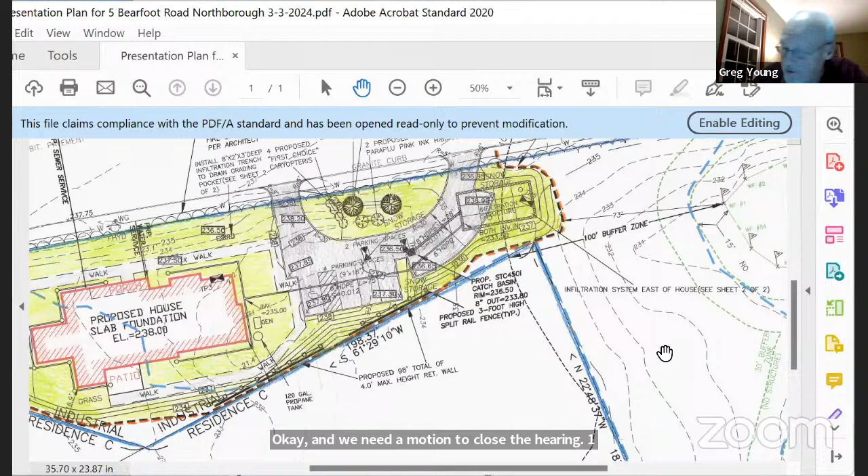Okay, then we need a motion to close the hearing on 5 Bearfoot Road. I just made that motion. Is there a second? Seconded by Diane. Roll call: Dan Clark, yes. Justin Dufresne, yes. Diane Gouldner, yes. Todd Helwig, yes. I vote yes.

Hearing is closed. Now we're going to issue an amended order of conditions - we need a motion to issue an amended order of conditions with notes around the CR, Vinny, is that it? With the condition for the CR to be in place before a certificate of occupancy is issued.

Right, I will make that motion. Is there a second? Second, seconded by Justin. Very good. Roll call: Dan, yes. Justin Dufresne, yes. Diane Gouldner, yes. Todd Helwig, yes. And I vote yes.

All set, gentlemen. Thank you very much for your consideration. Much better from our standpoint than Plan A, so we're happy. Yeah. Oh, one last question before you go - timeline.

So I was going to ask, with this we're filing, I think we might have had the building permit in. We're looking for a sign off. Is there a process for signing off on the building permit? Technically there is an order of conditions on this that covers it with the amendment.

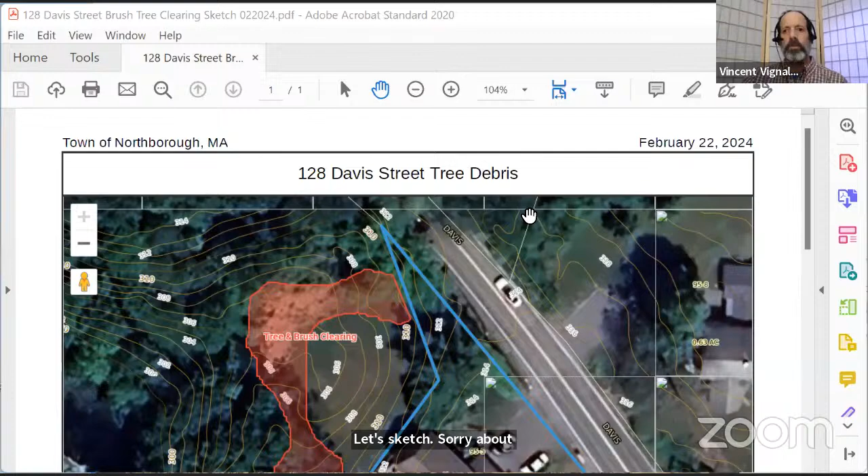So what I've got here is a screen share, a sketch of the 128 Davis Street tree debris. The property is in blue. They weren't sure of their property line - this line looks a little off because the neighbor's fence is there, so I think this whole thing shifts over a little. But generally they pushed brush and debris over all the way into this red area.

This area here is an existing field. This property owner had some trees cut back here, and in this area, they're all gone. The remaining stumps and brush were pushed back along this area. The wetlands aren't really shown here, but they're generally located around like this, and this is the flood area off Route 20, Hop Brook I think it is. So this is the area where there was impact.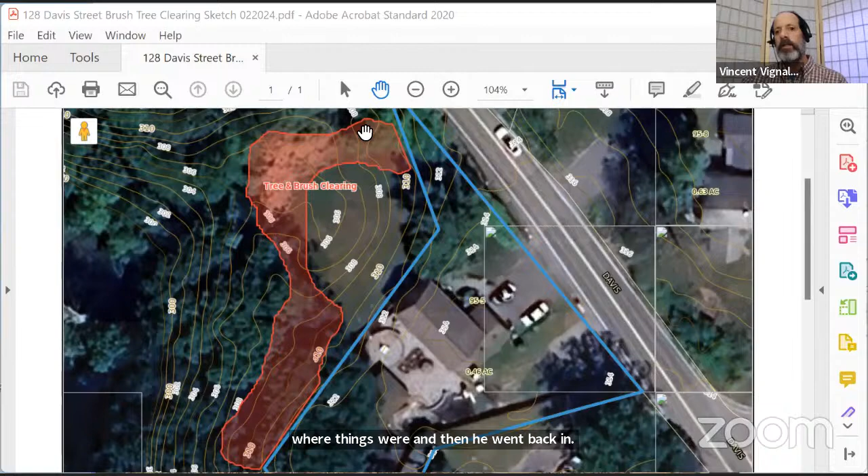So he stopped doing the work, we figured out where things were, and then he went back in. He contracted with that same harvester who came out the second time, and they cleared the area of what was altered. Let me try to go to the photos I had.

So this is looking from the back, the southern corner of the property. The property is actually over to the right - this is all the abutting property there. They did put the sediment control fence out there as I asked. The wetlands are probably about down in this area, it's about 18 feet away, and up here it's probably 30 feet away. But this kept any sediment from going beyond the work area.

And they went out and cleaned it. This was piled high - actually, maybe I should have shown the other picture first, this was the before picture. The other picture was taken from this area here, looking back. So all this brush, branches, and trunks were sitting in the area within the 100-foot buffer zone. This is the open yard area on the abutting property - that's what it looked like looking in one direction with the wetland in the back.

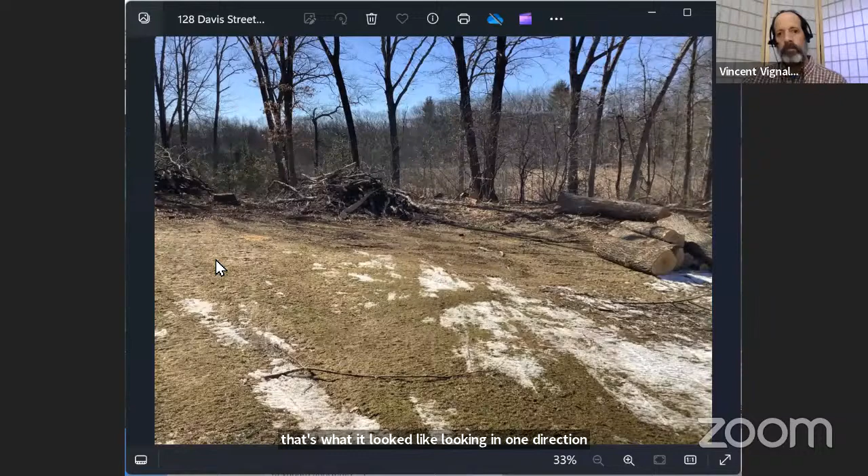This is looking from this way back to where the photo was taken from, looking back after they cleaned the area up. So it was an impact in the buffer zone. They didn't get into the wetlands. They were very close with this, but he's removed all the debris and cleaned it up. I think it's kind of been addressed, but wanted to bring the commission up to date on it.

Okay. Any questions on that, anybody?

Informal discussions, Vinny, we got 4 of them here. Harrington Lane, project status before street acceptance.

Yes, there's a question. They submitted last week or the week before a request for a certificate of compliance. When I went out there, there's still work that needs to be done. They hadn't submitted it in time to get everything done on the agenda for a COC. After looking at it, it didn't look like the COC was complete. I also talked with the town engineer, who said they still have to do some work out in the areas of the stormwater basin that's in place and the shoulders.

They were in the process of doing some work on the bounds. They had to replace or install some bounds along the property where the roadway was going to be for the street acceptance. I talked to Fred, and there were 20 or so items on his list of things that still need to be done. There's a swale that needs to be cleaned out and regraded.

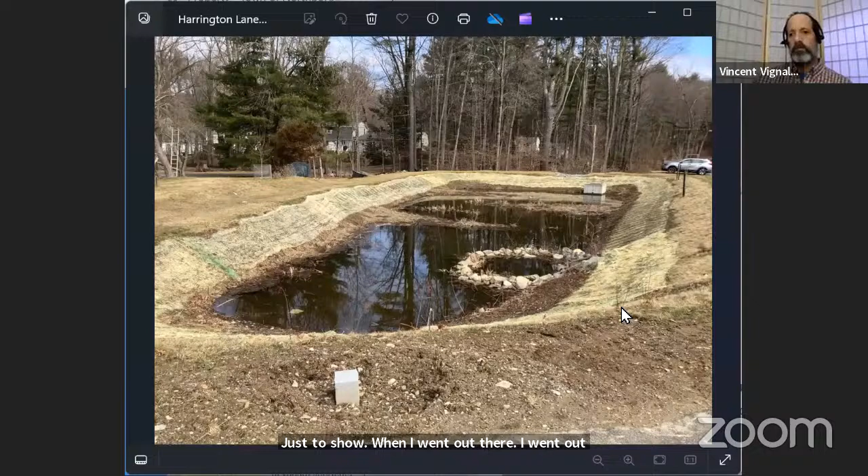Just to show, when I went out there, I went out on my own, and then I went with Greg. I think we went there, right? Yep, we did. Okay, so this is the status of the basin.

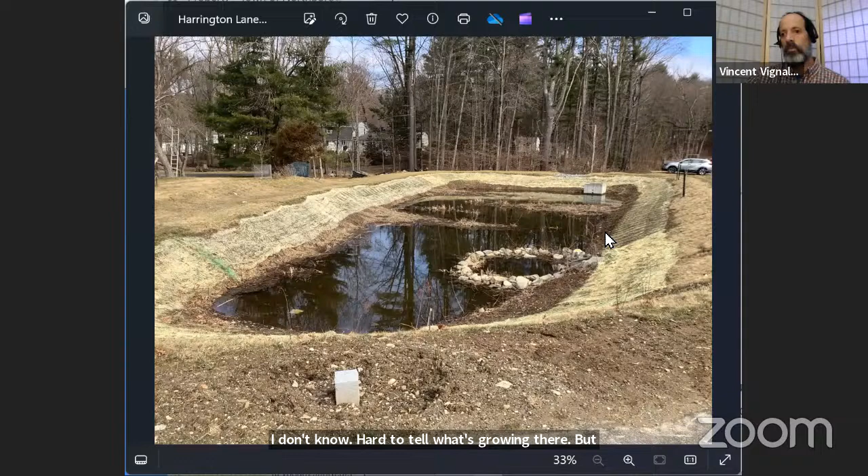Wetlands are on this end. This just got regraded, just got restabilized. There's been a bunch of work inside the basin itself. I don't know, hard to tell what's growing there, but this is not the wetland restoration work - this is just the stormwater basin, but I'm not really sure that it's perfectly stable. This is looking back the other way.

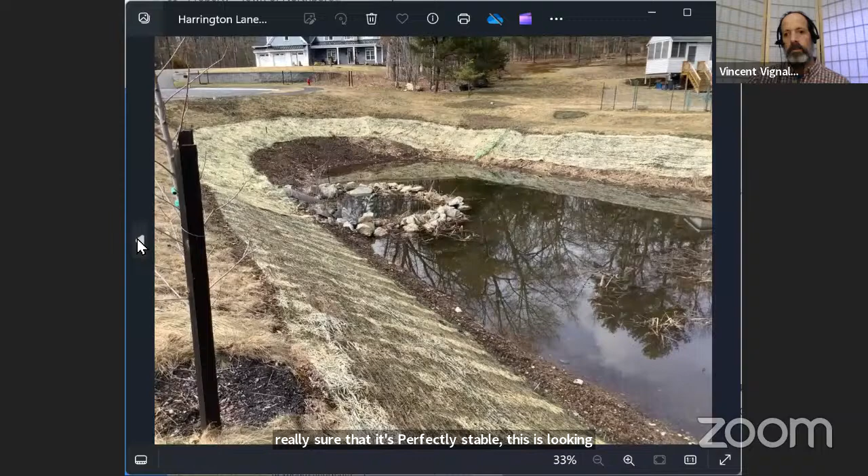They asked to be considered for a COC. I said they weren't ready, and they're asking for you guys to reconsider it. Is that right? It doesn't sound like that's promising. My view is that if Vinny says it's not ready, it's not ready. Doesn't look ready to me. And it isn't gonna hold up the street acceptance.

So Vinny, could you send Zoe a note with why it's not ready from your perspective? Yep, absolutely. And then we can go from there, Zoe. Sounds good. Looking for more stabilization around the stormwater basin. Yeah, he'll send you a list of what he's looking for. It'll probably be Thursday or so.

It will not hold up the street acceptance, so that can go to town meeting. Hopefully we can get this cleared up by next month one way or the other. All right, sounds good, thank you very much. Okay, thanks Zoe, I'm gonna eliminate you now. I'll take it, thanks. I won't come back, I promise. Thank you.